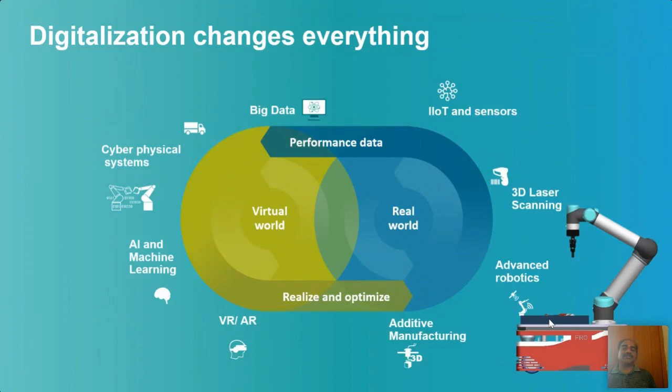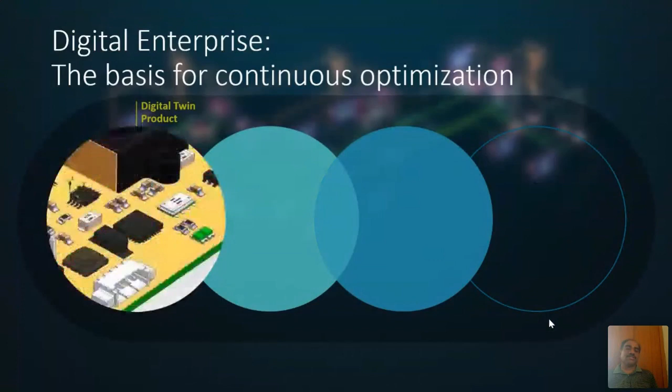So as a broad picture, we look at the digital enterprise, where the first area is ideation. Ideation is how do we create a digital twin of the product? How accurately are we able to represent it, how can you mimic the behavior. Whether it is an autonomous vehicle, a mechatronics product, or even a new mango drink recipe, it can be anything. How you create this digital twin of the product.

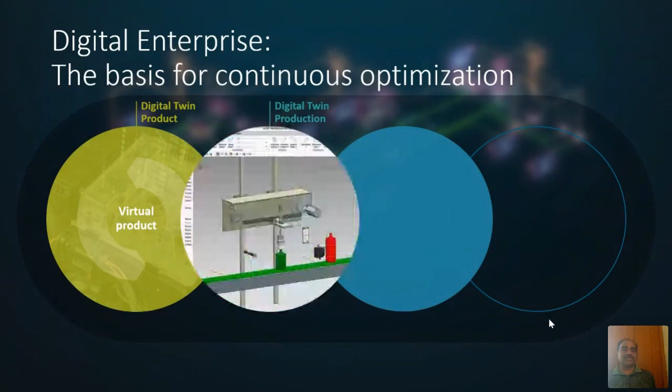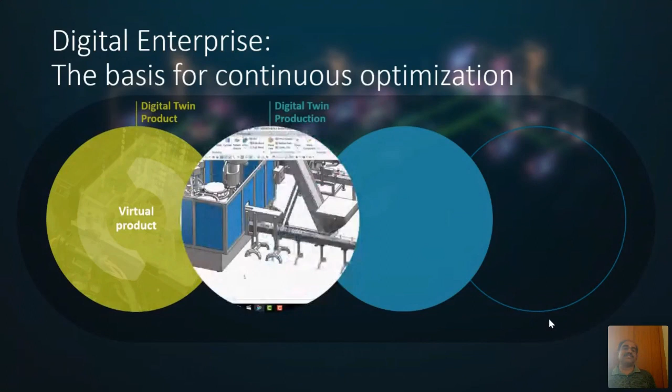And second, the product alone is not sufficient, because a lot of products have been conceptually exceptional but never became a commercial success. So it is essential that it is taken through production. We call it the digital twin of production. How do you bring the product onto the shop floor? What operations are required, the sequence of operations, what tools and fixtures, what kind of automation. Every activity of the shop floor, how do you create it? That we call the digital twin of production.

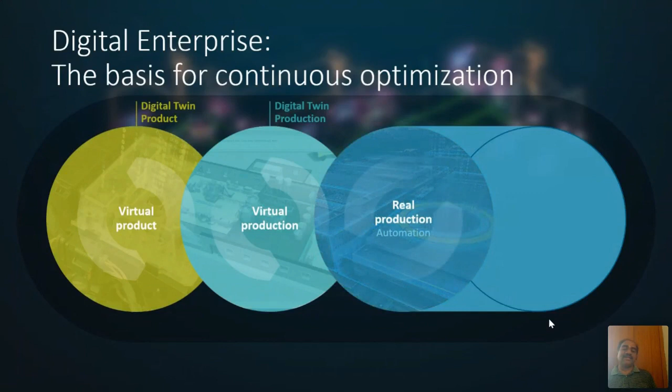And from the virtual world, we go into the real world, where whatever is designed and planned, how do we take it onto the shop floor? Exactly to the particular operator or machine, how do you provide this information, whether it is a PLC, SCADA, whatever automation system you have, or the people performing these activities? How do you ensure that whatever is planned and validated goes onto the shop floor?

And the last one we call the digital twin of performance, where we have the real product in use. It may be a machine on the shop floor, or a product like a mobile phone that we use. It can be anything. How are we able to bring that information back into the product and production, so that there is continuous improvement.

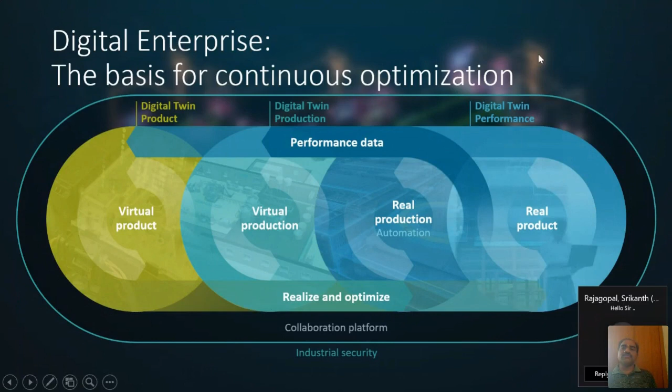Now, the next aspect of it, when you look at how the factory of the future is going to be.

Now, if you see on the scale, on the x-axis, you see the automation and autonomy. Primarily, in the early centuries, how you manufactured a product was more fixed and a completely manual kind of activity. As we travel through the x-axis, we are able to do very well with mass production, where we are able to produce a lot of products, but it is all specific, and with automation we are able to do that.

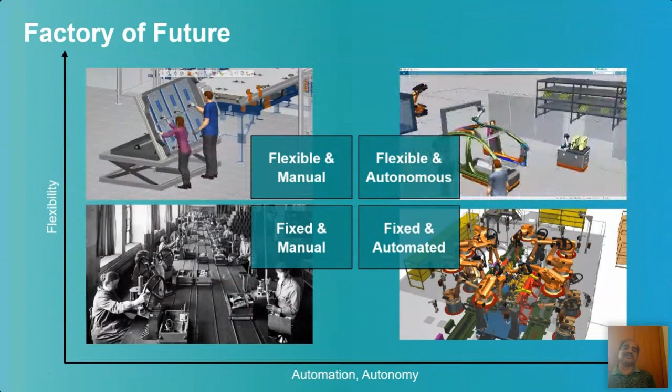On the other side, where there are a lot of manual operations, there is a high amount of flexibility. When you're looking at the future, there is more flexibility, and it is autonomous in nature, which means if you look at the station there, the right product comes there with the equipment. The equipment in this case may be the AGV, and the AGV brings the product which needs to go into the particular vehicle, which is configured for a specific customer. So you see there is a huge amount of change from the way we have been doing factories earlier, and what is driving today.

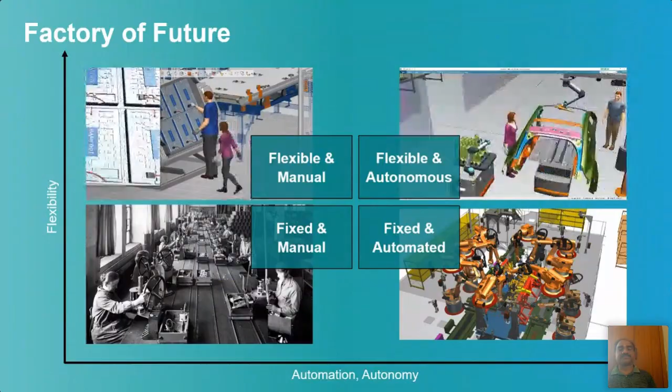Now, these factories have a lot of machine-to-machine communication. You have advanced robotics or mobile robots, hybrid manufacturing, which means a lot of components can get printed, and work instructions for every vehicle, in this example a vehicle but it can be anything, on how it needs to be produced; the technology comes from AR and the logistics. So a lot of things are there into it. That's a higher level, 30,000 feet picture. But when you go down into the details, let us look at each of these specific factory of the future opportunities.

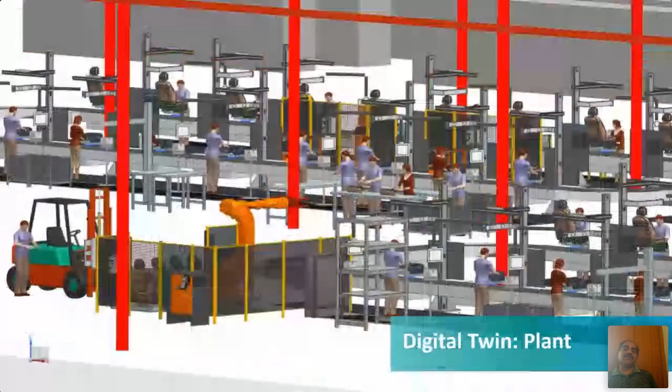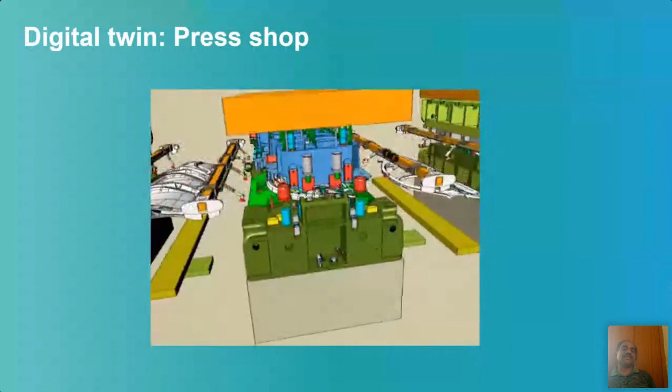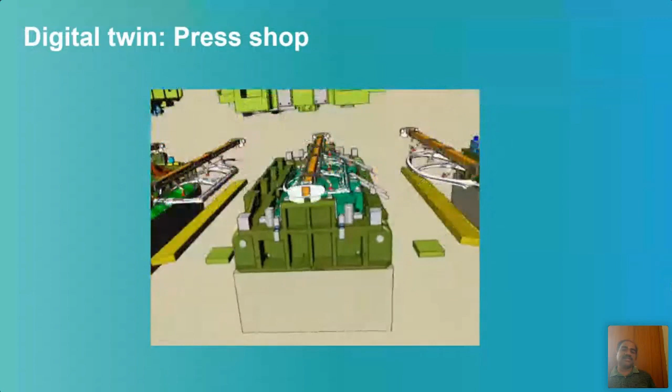First, we can look at how you create a digital representation of a plant. You have tools to create every aspect of it, so there is a mimic of what is happening on the shop floor. And it can also go deeper. Not just the static representation, but you can simulate, say in this case, a press shop: the complete press line behavior, how the parts are going to be, how you're going to change the dies, how you're going to transfer the parts from one die to the next die, what will be the cycle time, what setup changes may be required. So every aspect of it.

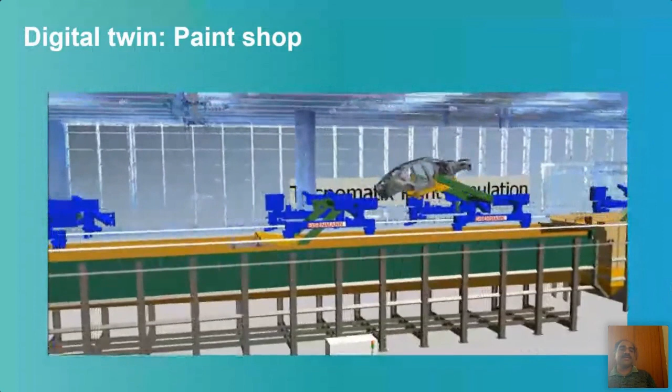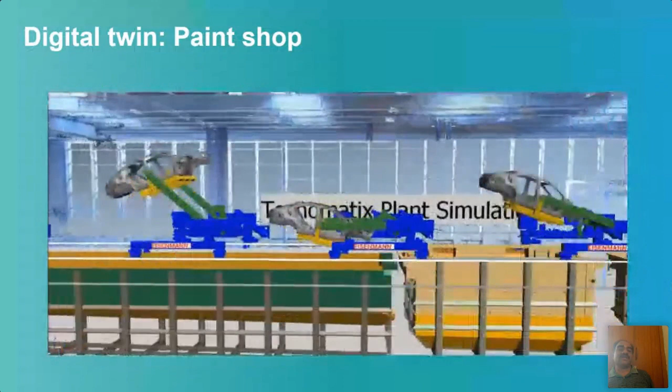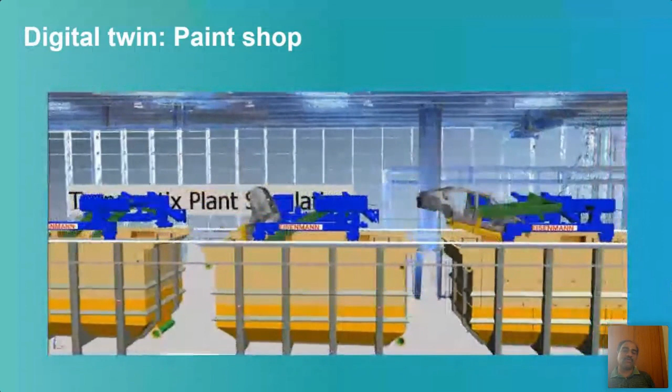In this case it's a press, but it can be for painting as well. The same parts which are pressed and welded, which we will see in the next few slides. But how can you simulate the painting scenarios, because painting is more complex. You have a paint change in the assembly line. One car can be yellow, the next can be white, another can be red, and so on. But in paint, you cannot do that level of flexibility. There are certain constraints. You can do it, but you have to spend more time, the cost is higher, and things like that. So how do you optimize that, and how do you create programs for that?

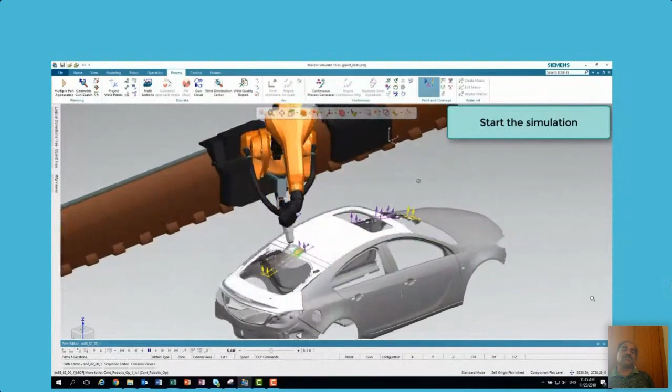In this case, you have robots which can paint. So how do you program these robots? If you do that manually, it's going to be extremely cumbersome. Manually programming the robot is more complex, because there is not much trial and error you can do, since it takes a lot of time and is very expensive. And importantly, the launch of the product is critical, to meet a specific timeline.

Now, another question comes across: okay, this is for a new line or a new plant, but what happens if a plant is already running? Then what can I do? You can actually do a simple scan. The scan can be even with photographs, your mobile cameras, or with laser scans, or similar capability.

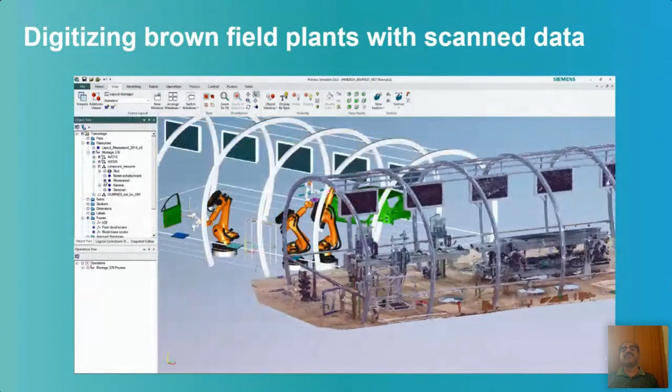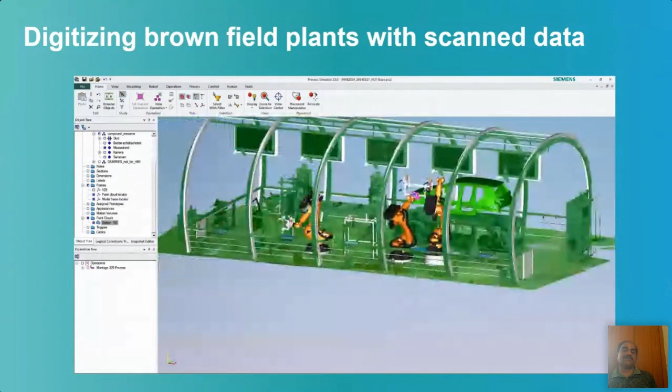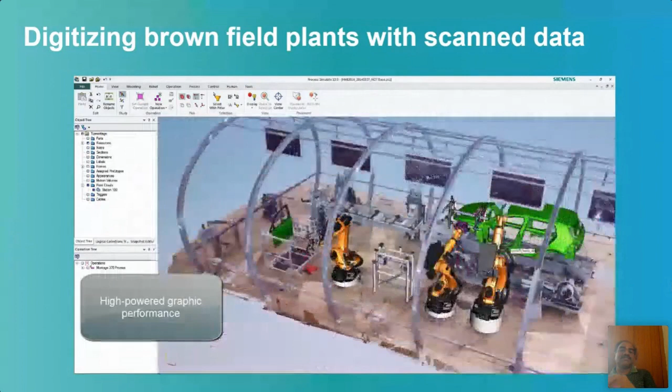Now what you're able to do is put these pictures in as a point cloud, and you're able to have a hybrid scenario of this point cloud and the new changes. So practically, say you have a factory, like a Hyundai factory, or suppliers of Hyundai. You can take pictures or scan the area and bring it down as a digital twin point cloud, then make changes. So you see the scan as well as the robots and components that are the change coming into the current shop floor. You have a hybrid of the real world scenario and the change you'd like to do, and you're able to create that validation digitally.

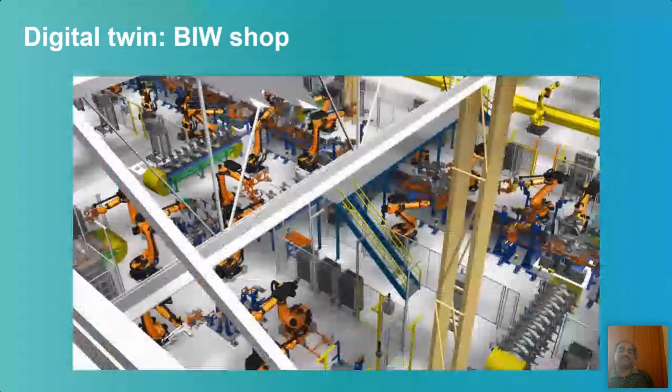Now, the scenario can also be with welding. How can you have this automation done? How many automations are required, or in this case the robots, how do you distribute them if there is a weld spot, how do you plan for this? A lot of things can be done, and you have software digitally to handle each and every aspect of it. This can be validated, and you can send the offline programs into the machine so that it works perfectly well.

Now, the same scenario, you can also optimize the running of the plant for energy consumption and setup changes. If you're studying operations research, as a supplier, say I'm supplying to 5 different OEMs like Hyundai, Maruti, Daimler, and so on, with one line which supplies everything to everyone, there are a number of projects or orders. How do you manage the setup changes? How can you promise delivery within a certain time?

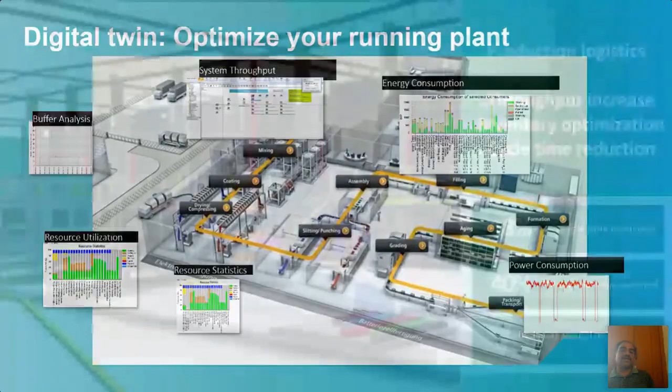There is always a complexity. You cannot build inventory, because that becomes a cost. You cannot delay, because then you won't get the further order. So a lot of problems exist, and for every supplier, every MSME, this is a big problem, because if they produce it earlier, they lock the money, and if they don't, they won't win the business. So how do you optimize it? This is a challenge for everyone, and there's a digital twin where you can use this to validate and optimize all this scenario.

Not only the production, you can also simulate production logistics. You can also look at the warehouse and warehouse logistics, because a lot of e-commerce business comes in. Now, how many warehouses are required, where they should be, what kind of automation, because the number of articles inside the warehouse is going to be extremely high. So you need a huge level of automation, and it needs to bring material within the specific cycle time, following a sequence of picking. So there's a lot of simulation and optimization involved. How do you plan? How do you deliver it?

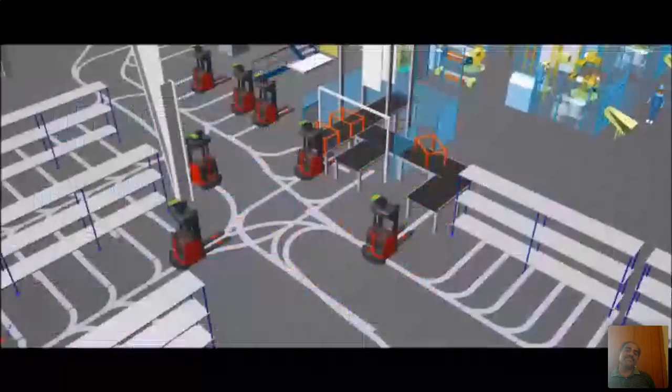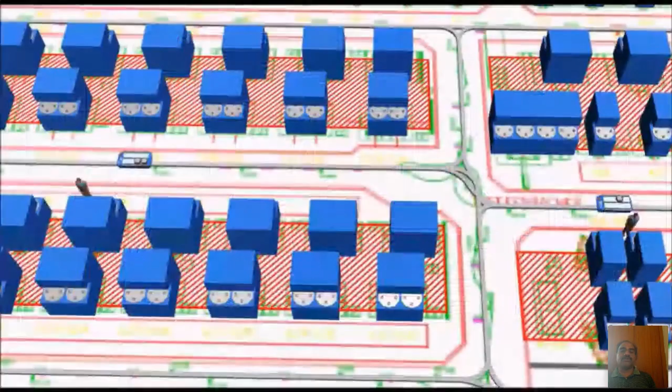And there are always new AGVs, because we'd like to reduce people movement around, rather than having 10-15 people providing the material. Now you can have a few AGVs continuously running around, providing material to the operators at the right time. This makes work a lot easier, as well as helps follow social distancing, which is something we'll see in a little more detail.

For example, one specific fuel nozzle for power generation, which one of our Siemens divisions used to take several months to produce, now they're able to do that in a few weeks. If you don't have that spare part, or if the spare part needs to be made, then the power generation has to shut down until you get this part done. That becomes a huge advantage when you're able to use this technology in those kinds of scenarios.

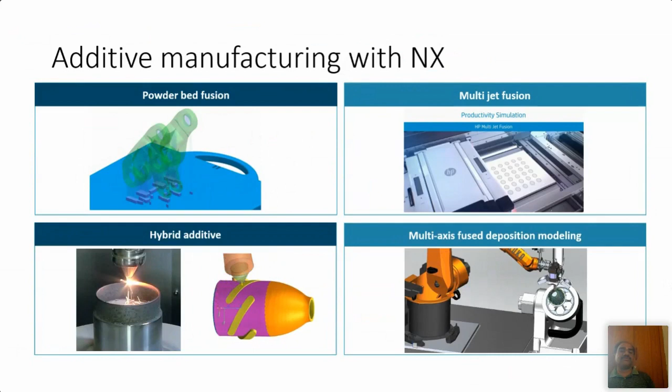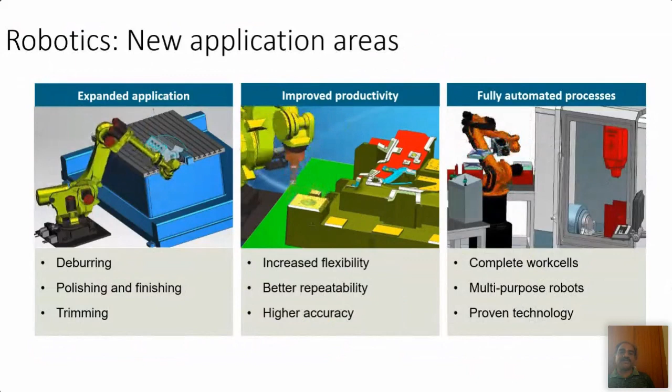There are other applications like typical machine tending and machining, a lot of soft machining being done with robotics, which gives a high level of flexibility. You have a robot you're able to use for multiple purposes, instead of having a separate turning machine and a milling machine, those generic machines themselves become more specific. Now robots are becoming more generic in nature and able to be programmed for multiple levels of activities.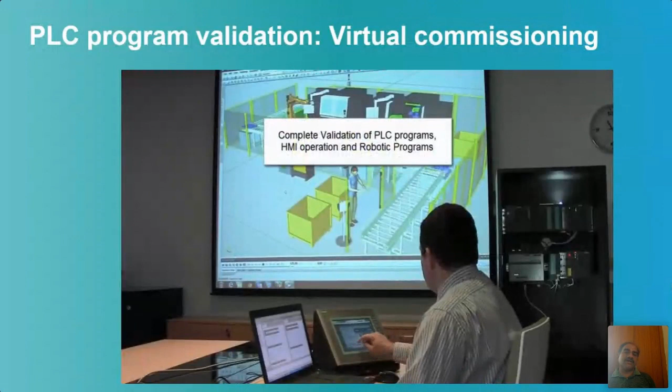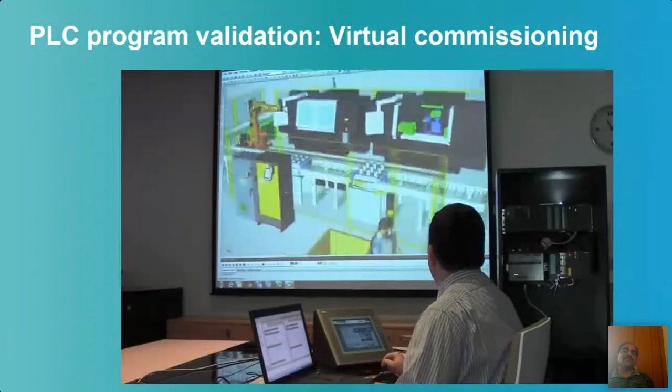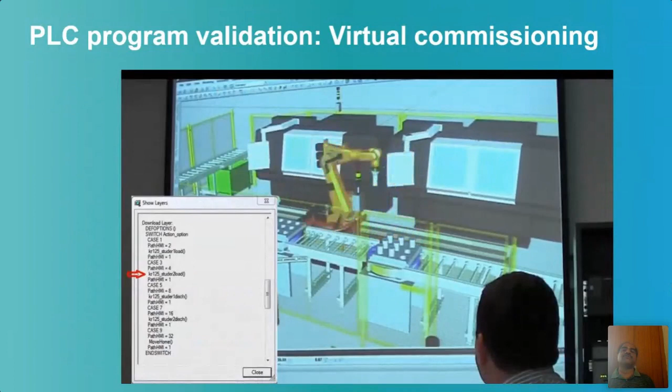For a shop floor, it's not just individual robots, but if you look at complete automation, you need the PLC programs working together to ensure the shop floor runs smoothly. So how do you create and validate the PLC program without going into the shop floor? This is virtual commissioning, where you actually run the real PLC program, but against a virtual factory instead of the real one. So you're 100% validating your programs, ensuring every signal, safety scenario, and other possibility is virtually validated.

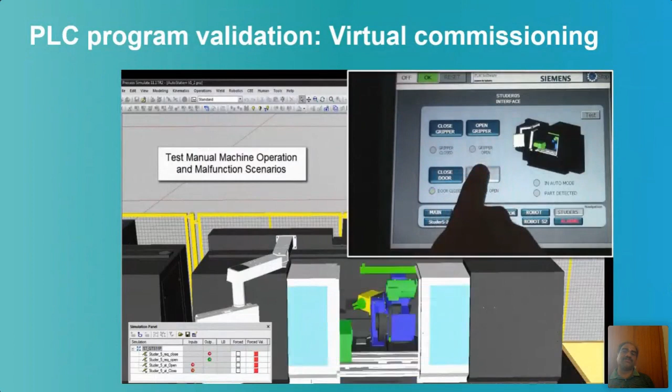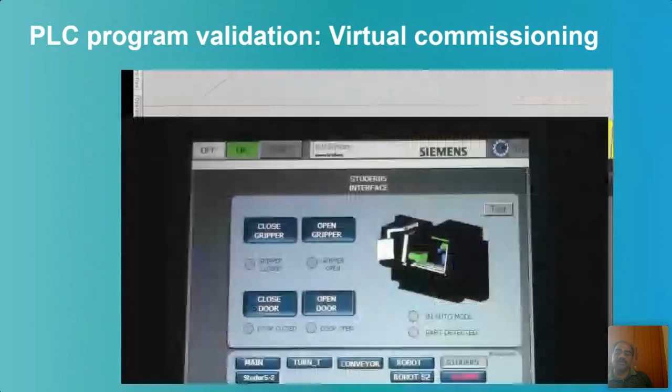You're looking at things like closing the door, opening the door, the emergency switch. If somebody puts in a hand, what happens? Every scenario, you're able to respond to digitally with the real PLC program controlling it.

You can also simulate, for a lot of organizations, energy is a huge cost of running the plant. You can simulate the plant and identify how much energy is being consumed, and look at optimization to see what possibilities exist to reduce energy consumption, which becomes a huge saving, not only in terms of money, but also in terms of emissions going into the environment.

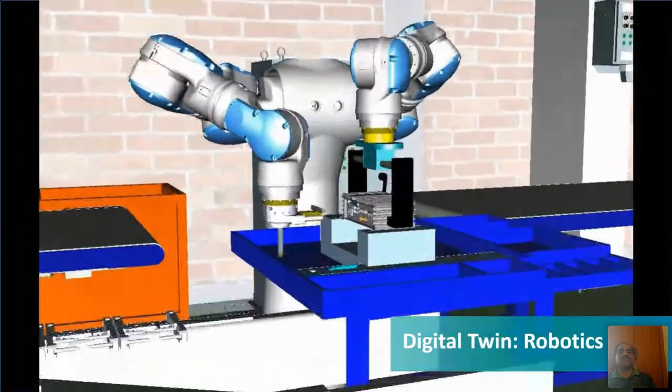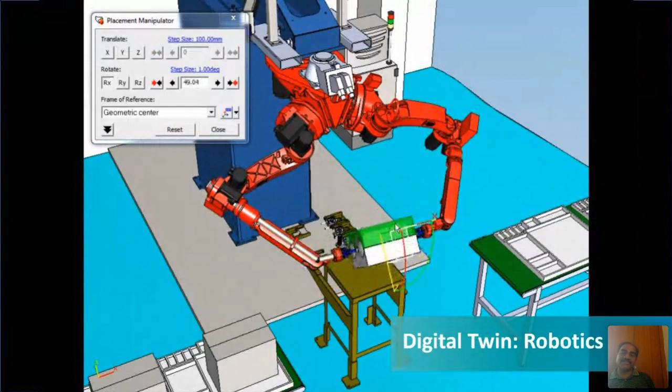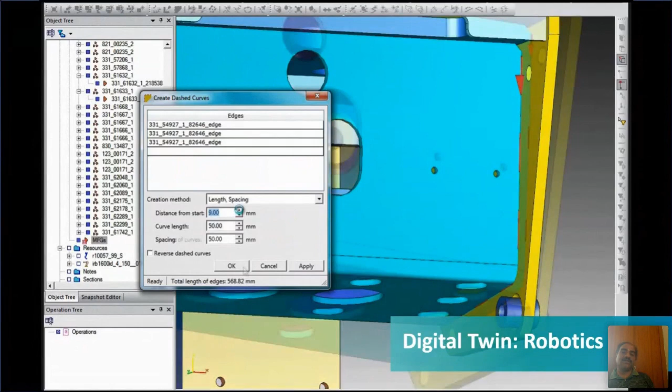There are new kinds of robots becoming more popular. You have cooperative robots, where two robots work together cooperatively, basically like two hands, with one hand sending signals and information about how the other hand is going to work, allowing for much more complex operations than possible with a single robot. Cooperative robots are becoming more popular, and cobots too, because of safety. You don't need the typical safety fence, since the cobot can understand it's working in a human environment, and if a person comes near, it can stop to ensure the work is smoother, bringing it in and out as needed.

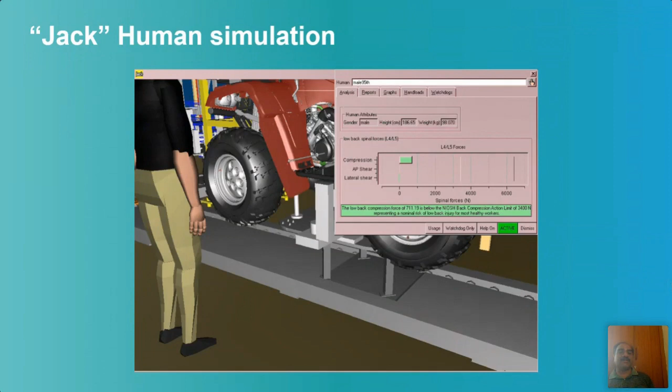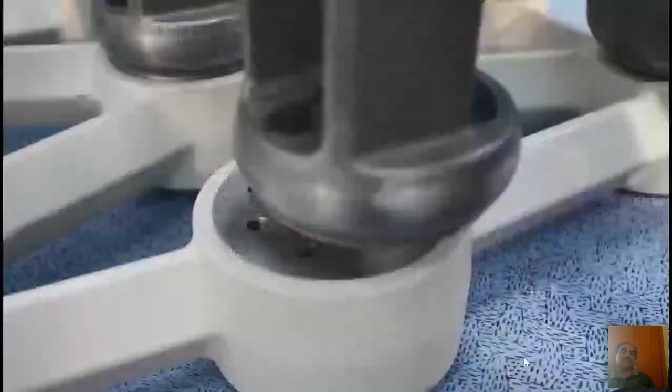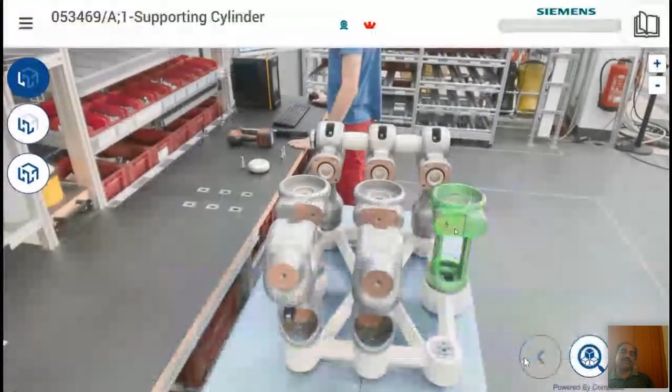We also talked about AR, which is becoming extremely popular, because the number of changes and new products is increasing. This operator gets a step-by-step help guide: now you have this part, what's the next operation, which part he needs to pick, where he needs to place it. Everything is guided step-by-step, whether for assembly or for service.

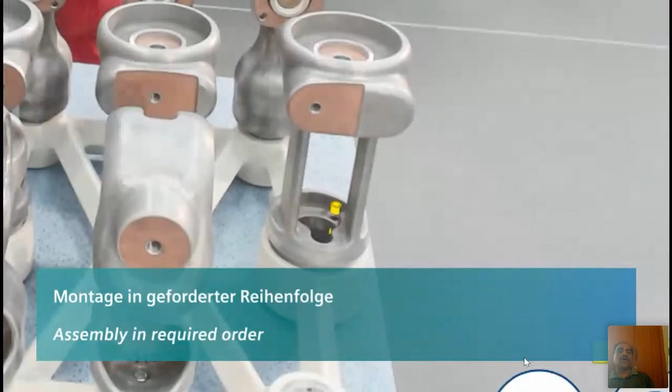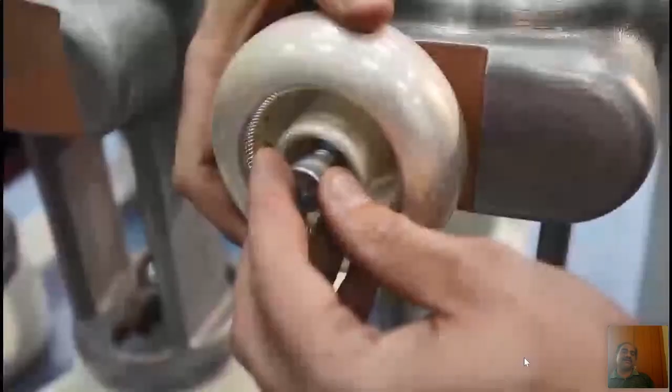Assume there is machinery which needs to be serviced, and you don't have a specialized operator. Now you can use a normal person who knows the machine. He can get help remotely through augmented reality, where the scenario is superimposed to know exactly what steps need to be performed.

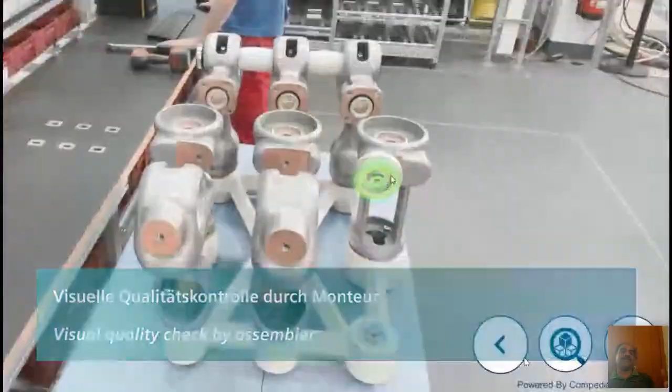For example, there's a gearbox problem in a windmill, say somewhere near Kanyakumari, and the expert is sitting in Chennai. Now you can switch on the AR and see what the operator is doing, and it also provides help on what he needs to do through that AR. For additional help, there's also a command and control center for what needs to be done.

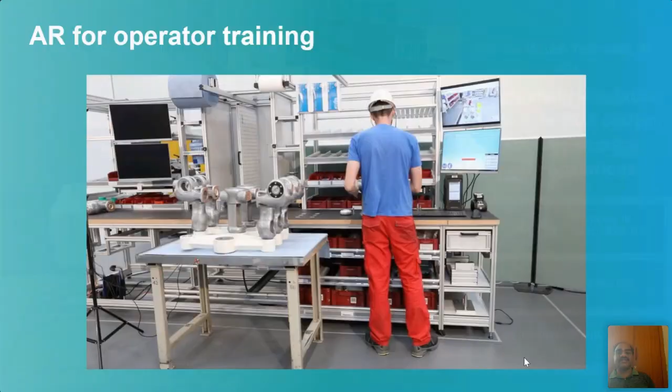It can also be used for high level supply chain simulation, which is a huge subject - what kind of planning, how you can evaluate, how you can validate, all this can be done, and connect with the IoT. You have the capability of connecting with all the sensors and pushing into the cloud. We call this MindSphere, and you can bring this information back into the digital twin, so there's continuous improvement of the shop floor data with this digital twin.

That's a basic background of what I'd like to show on the digital twin. Now let me go into more detail on this example of social distancing simulation to ramp up production. Let me open up the model.

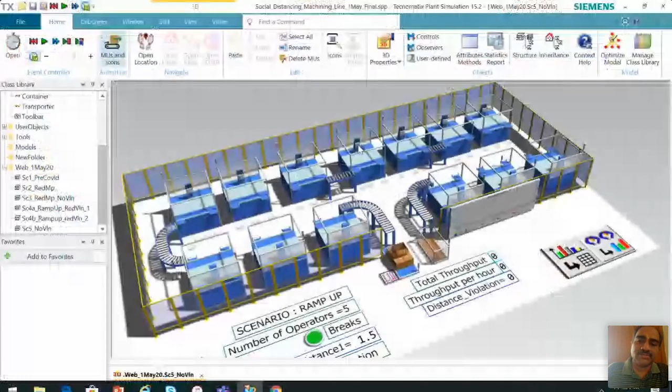Okay, Bahid, can you check if you're able to see my screen? Yeah sir, it is visible.

So now if you look, there is a plant which is there, and let me start producing in this plant. You can actually virtually run this plant for production. So now I'm running with the operators here - as you can see in the model, I'm running with 5 operators, and what is the scenario, what is the total throughput, you can simulate and validate it.

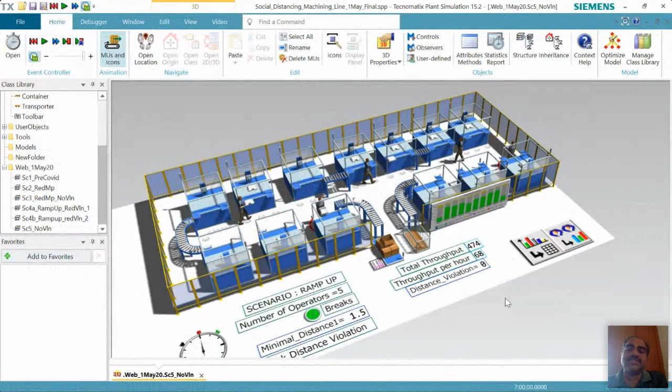Now for this plant in a shift, this line produces about 474 components. You can also see the level of individual machine utilization which is there, and what you can also see is...

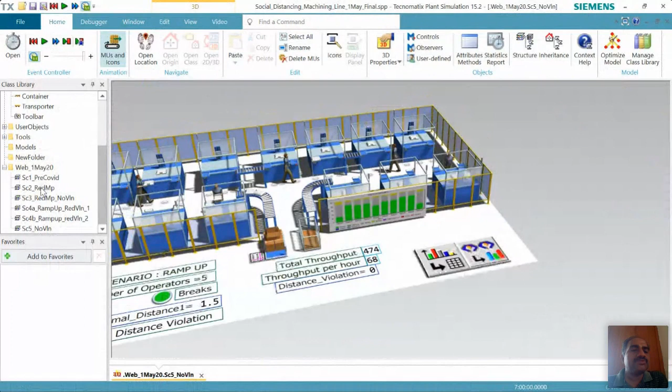Now let me come down and see the new scenarios. This is the scenario before COVID. Now with the current scenario, you need to practice social distancing, so there is a change. Now what I'm trying to do is, if I run this plant with 2 operators, then how do I run this?

How do I run this means how do I balance what activities each person will do, and how much will be the output, what shift pattern I need to give the operators. Maybe it's not a normal shift because people cannot go to the canteen or lunch break at the same time. So how do you give a staggered shift? All these kinds of scenarios, you can see.

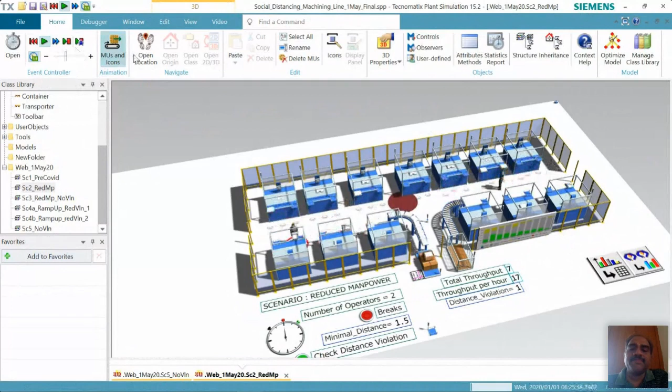Now you can also see, with these 2 operators, can you see the brown area which is there? You can see that there's a brown area - each person puts a distancing, saying both persons cannot come near within this 1.5 meters. You can set it as 1.5 meter, 2 meter, or 1.25 meter, as you'd like.

But while working on it, now you see there is an area where there is a violation, and you can see there is a certain number of violations with 2 operators. We'll also figure out what can be done about this.

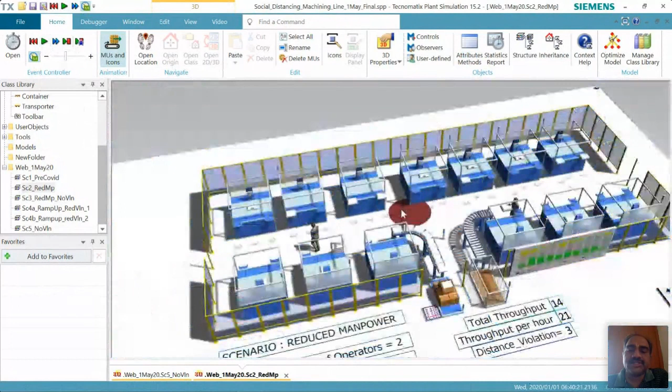Now for this area, I identified that there is a violation, and you want to ensure some change is made, and also look at the amount of throughput, whether that is enough, whether you want a different kind of approach. You can see a lot of what-if scenarios.

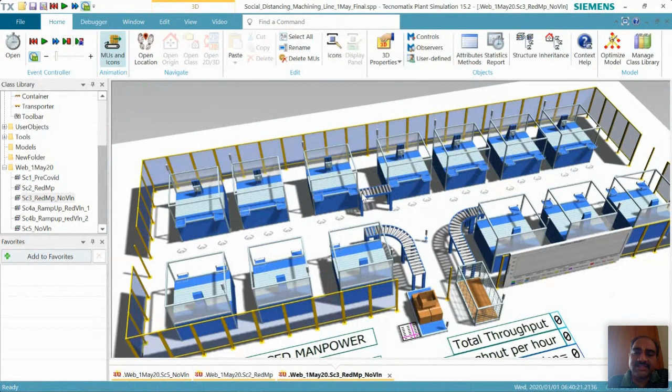Now in this model, what I've done is everything remains the same, except at this level there's a small conveyor which is added. If you're able to see that, there's a small conveyor which I have added. Now I can run back the same kind of simulation.

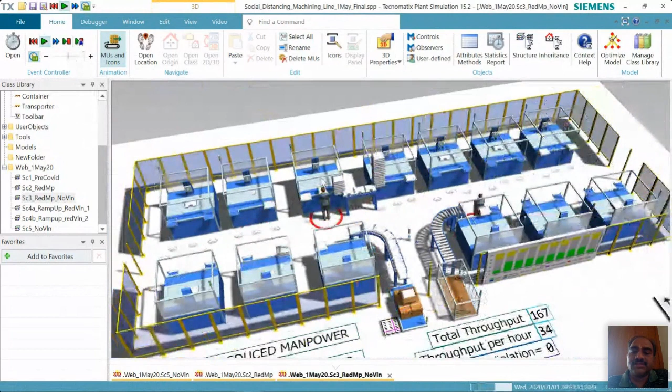You can also speed up depending on what you'd like to do. So I just add. Now you see, as long as the part starts producing, I still don't have any violation. You can also see that the violation is nil, and the 2 people are able to work without both of them coming near in this kind of production. So at least you are able to see how you can balance what needs to be done.

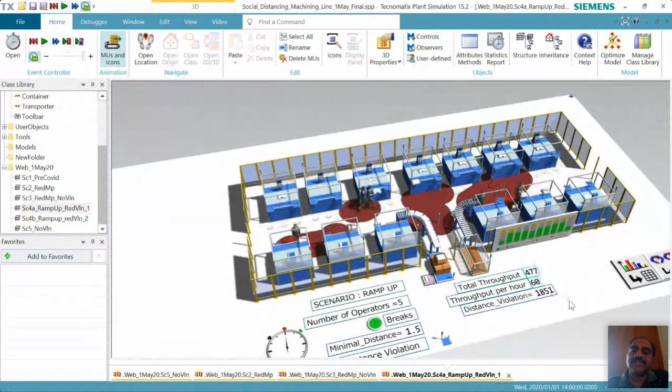Now imagine the scenario where you're ramping up, and you need to produce more because the demand has increased. Now with the 5 operators, you can see the amount of brown spots which are there. The brown spots give you the amount of distance violations. If you're seeing there, currently it's clicking 1,500, 1,600. So there is a huge amount of distance violation, which means there are a lot of operators who are coming close to each other, picking up these parts or performing some work.

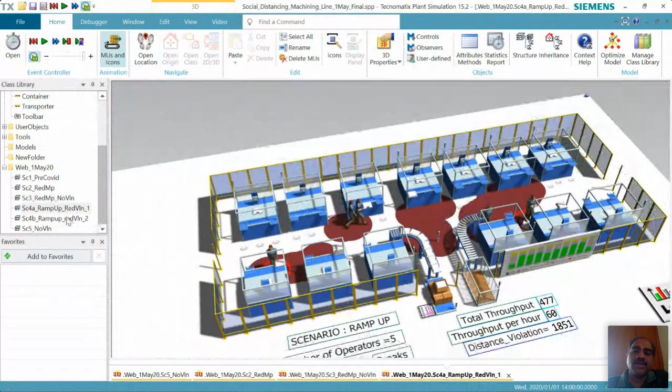So there is a lot of possibility or risk of catching if there is any issue. So you see that the total throughput is so much, but there is a huge amount of distance violation. But I still need to produce so much, and I don't have much option to change the layout. What can be done? Anything to do a rebalance? Can I change my work so that I minimize the distance violation? That's a possibility you can try. So I try to do that.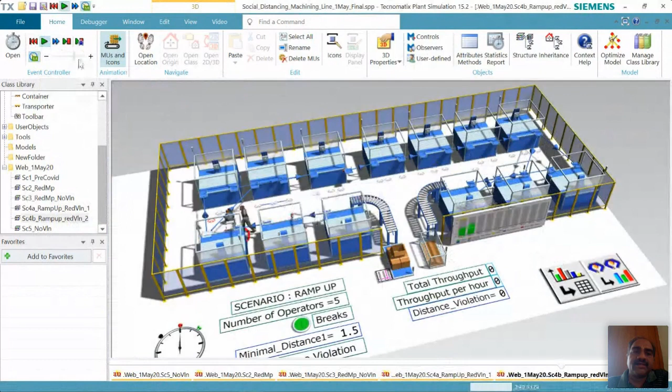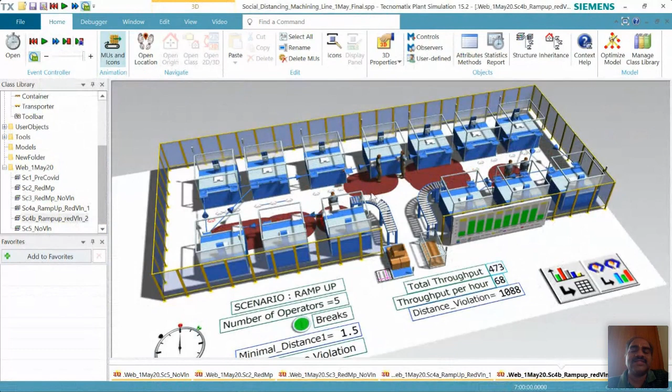And now you can see that while there will still be some violation, the amount of violations is far lesser compared to what it was. Earlier there were more than 2,000. Now the distance violation has stopped at nearly 1,100. So while there is a certain amount of reduction, there is still an issue. Now we can also look at the other possibilities: can I still meet my production target and meet the social distancing norm as well?

So in this case, what I've done is add a short conveyor at 2 or 3 places, and then simulate the scenario where I meet the production requirements without violating any social distancing norms. Now you can see this scenario while all the operators start working. As of now, there's no distance violation, and you're able to meet the throughput, the overall production count.

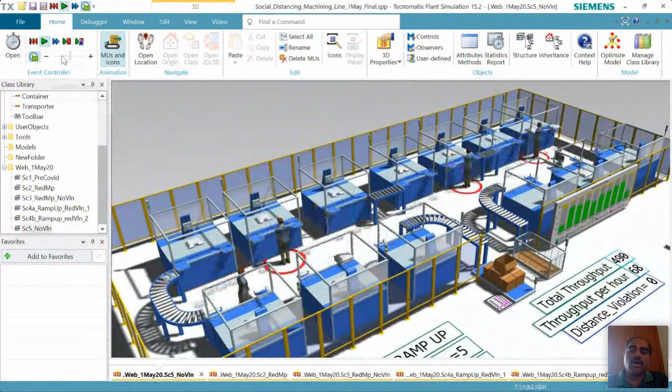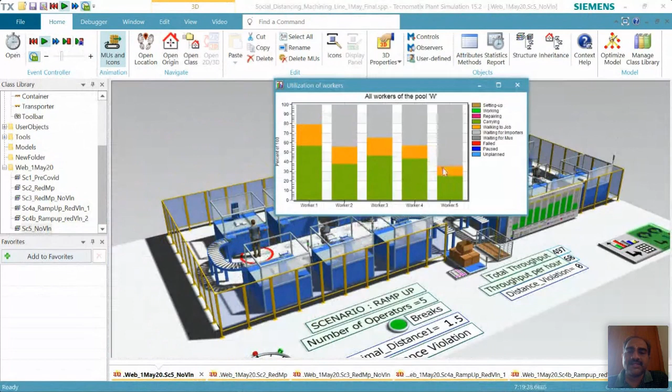So basically, you can evaluate multiple options, and you can see that there is some increase in throughput as well with the additional automation. You can also rebalance the work. Let me show in detail. These are the 5 operators and how they are loaded. The highest one is loaded about 55%, he spends about 20% walking, and the rest 20% he is free. And the 5th worker is actually free about 60%. So you can look at what options are there to evaluate and optimize the scenario. Now this is a specific area.

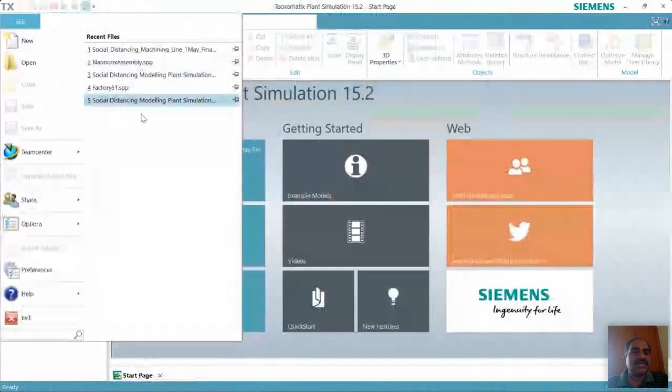Now what you can also do is simulate the complete factory. The factory is not limited to one specific area or one particular line, but you would like to simulate from the time the employees come inside the gate, how they follow the distance, how they go into the canteen, how they log in, take a lunch break or a tea break, and how they operate in each and every area. This whole thing you can run as a complete plant.

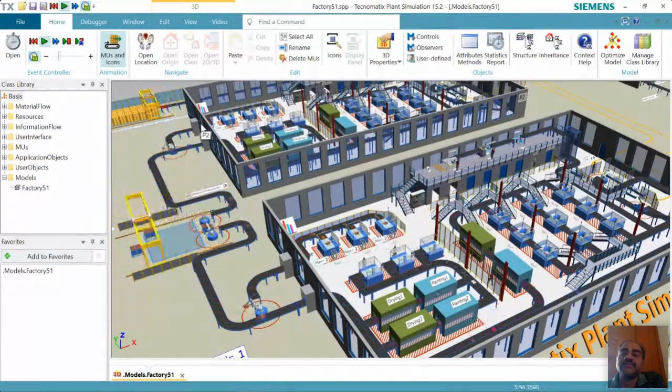And now you can ensure how you are ramping up, how you are working with the number of people when production increases, and how you manage the scenario. Every aspect of it you'll be able to simulate, and you can run through different levels of optimization, and the plants can run much more productive, much more efficient, and can service not just the current production, but also take more opportunities.

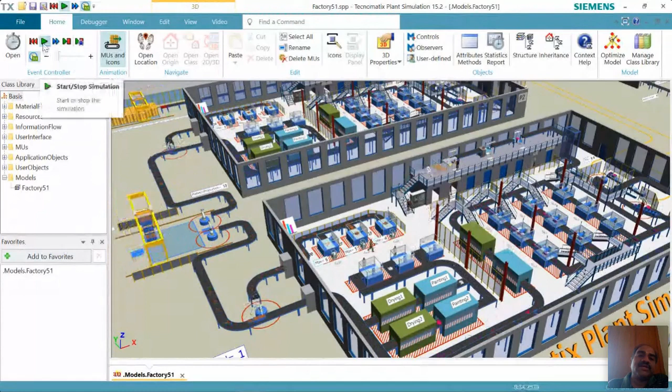Maybe some opportunities come from outside the countries as well. There is a possibility of what can be taken, whether they can deliver it or not. Then it is important that before they take the order, ensure that we are able to do the production, so that after taking the order, you're not missing it out by not being able to supply. So all these things can be validated with a digital twin. So that's the portion I would like to show you.

And with the uncertain scenarios, when the companies are looking at it, they want to start the business with health and safety, minimizing the workforce with fluctuating demand, right? And also, how do you ensure that we have the supply chain readiness? That is one way of starting the business. And on the operation side, how do you work with minimal people? How do you rebalance this work? How do you plan your shift? How do you maximize the productivity?

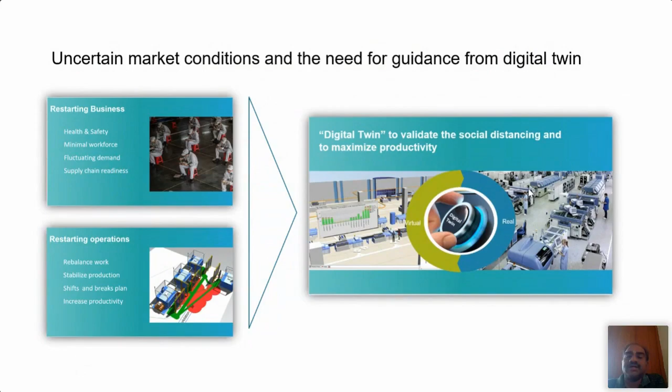And that is when the digital twin, whatever you saw, becomes extremely useful, because otherwise you have to try it on the shop floor, and then it becomes too risky, because you don't want to have multiple people coming near, and then it becomes a bigger problem. So in short, with this digital twin of production, you can use it for improving the throughput and productivity, optimizing the manpower, and also reducing the inventory, lead times and energy costs. So a lot of things you can do with the digital twin of production.

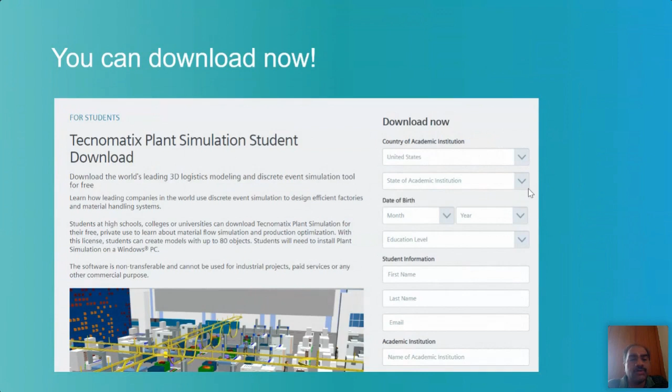And the good thing is, this is available for every student, and you can download it now. You can just search for Tecnomatix Plant Simulation and look for the download. So you can create a digital twin of the production, and you can help the companies nearby, bigger and smaller, with how they can operate and optimize, and that can be a good industry project that also benefits the companies.

Now the second side of it is, you can also look at the student editions for various other things like Solid Edge, PADS and a lot of other CAE software. You can also have the digital twin of the product, what we call Simcenter. And the human, what we saw earlier, we call it Jack, that is also available. And there is also Plant Simulation, which is the module we saw today, which you can also download and use.

There's also another area of interest, because most of the students are comfortable with programming. There is also a low-code platform, which means even people who are not expert in programming can very quickly create apps. Say, for example, you want to create apps for the local industry, you can use this one. We call it Mendix. The apps can be deployed on the cloud as well as on-premise, and for creating apps it is free. So you can start doing that, and you can also combine it with AI algorithms.

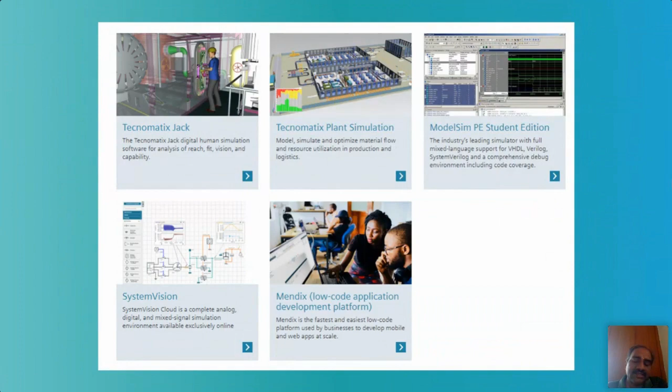So you have the Google AI or the Microsoft AIs which are there. You can use the machine learning algorithms and combine them to create the apps and deploy them, possibly in weeks, or even in days actually. This could be a huge advantage. You can also do a lot of things internally within the organization. Maybe you're doing an attendance sheet, or creating an app for people who are working remotely. So a lot of applications you can think of, combined with AI/ML kinds of algorithms as well.

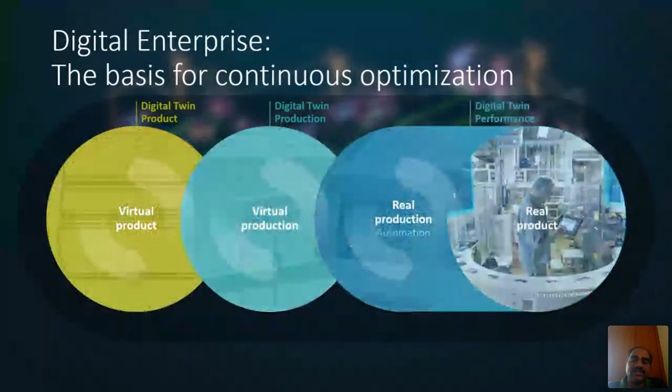So that's basically what I would like to share on the digital twin, the whole idea with the product, production and the performance side of it. And I would like to open for